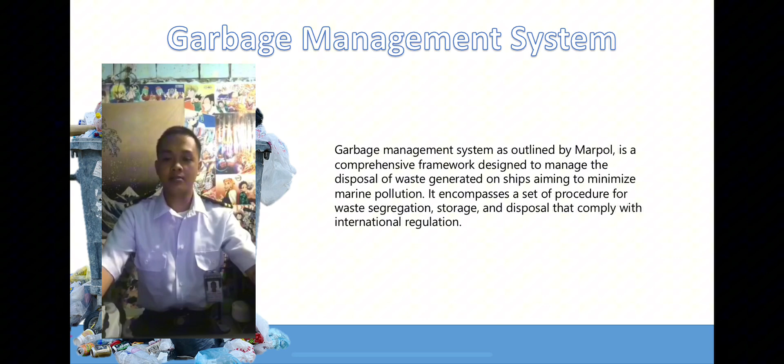The Garbage Management System, as outlined in Annex 5 of MARPOL, is a comprehensive framework designed to manage the disposal of waste generated on ships, aiming to minimize marine pollution. It encompasses a set of procedures for waste segregation, storage, and disposal that comply with international regulation.

The system includes clearly designated bins for different types of waste, such as plastic, food waste, and hazardous materials, ensuring proper handling and treatment. It mandates the maintenance of accurate records of waste management activities, including quantities and disposal methods, to promote accountability. Training and awareness programs for crew members are integral to the GMS, fostering a culture of environmental responsibility.

Additionally, the GMS incorporates monitoring and compliance mechanisms to regularly assess adherence to the plan and address any issues. By implementing a robust GMS, vessels not only comply with legal requirements but also contribute to the protection of marine ecosystems. The Garbage Management System (GMS) outlined in Annex 5 includes procedures and equipment for managing waste generated on board.

For example, garbage categories. Here are some examples of garbage categories. Food waste. Food waste includes leftover food scraps, vegetable peels.

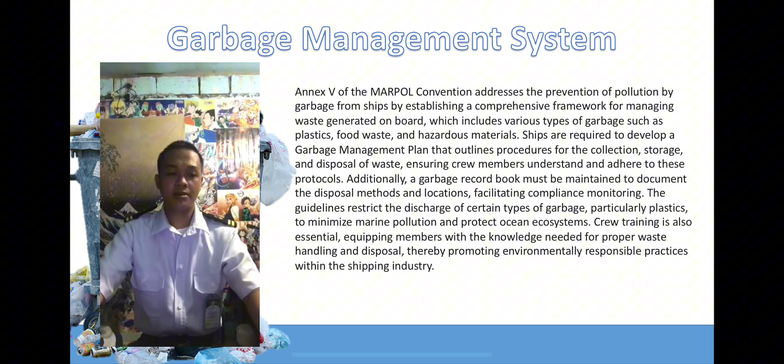It emphasizes garbage minimization, garbage collection, garbage storage, garbage processing, garbage disposal, equipment used on board for handling of garbage, and designation of the person in charge of implementing GMP. GMP stands for Garbage Management Plan.

Garbage Record Book. Entries in the Garbage Record Book. When garbage is discharged into the sea, it's necessary to record the date and time, position, categories, and amount of garbage thrown. When garbage is discharged to the reception facilities ashore, date and time, port, category, and amount need to be entered in the garbage record book.

When garbage is incinerated, it's necessary to record the date and time, position, and amount. For accidental or other exceptional discharge of garbage: date and time, position, category, amount, and reasons and remarks.

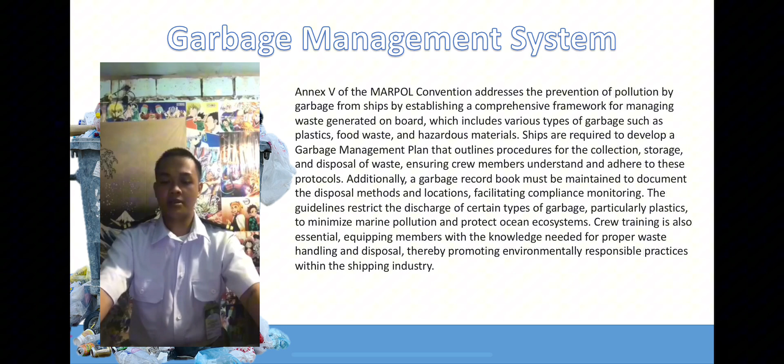Additionally, proper waste management ensures the safety and health of crew members by minimizing hazards associated with contamination and pests. It enhances the ship owners' commitment to sustainability, attracting clients and partners who prioritize responsible practices.

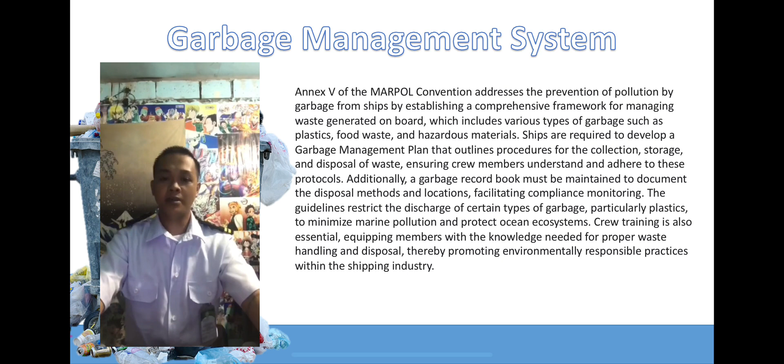Furthermore, a well-implemented GMS improves operational efficiency by streamlining waste handling and reducing disruptions, while also promoting recycling and resource conservation. Overall, adherence to the GMS is essential for legal compliance, environmental stewardship, safety, and operational effectiveness in the maritime industry. That is why it is important for us to understand the importance of the garbage management system under Annex 5 of MARPOL.

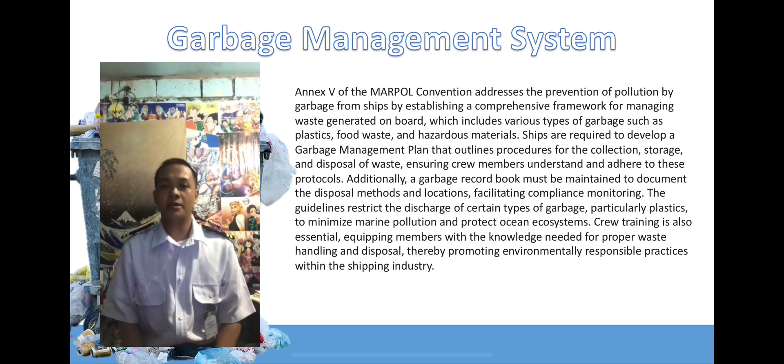Good morning, classmate. I will explain to you about the MARPOL Annex 5 reception facilities. MARPOL Annex 5 is especially designed to prevent pollution from garbage generated on ship. So the garbage or trash that we generate is covered by MARPOL Annex 5.

It establishes regulations that dictate how ships must manage their waste. This also covers how ships should manage their generated waste, including the requirement for adequate reception facilities at port to receive this waste. Wastewater, waste oil, and hazardous waste from ships are treated and processed in the port reception facilities.

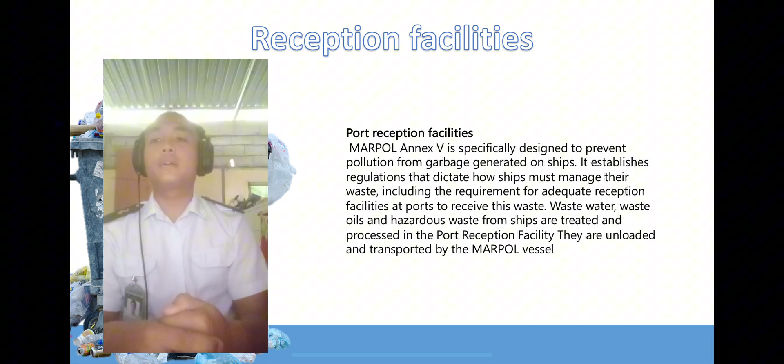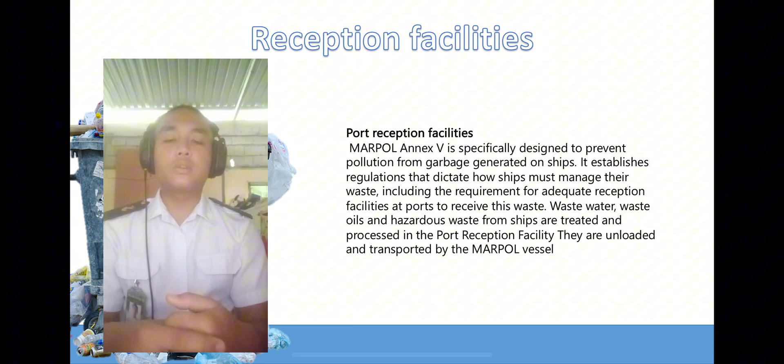Wastewater, waste oil, and hazardous waste from ships are treated and processed in the port reception facilities. They are unloaded and transported by MARPOL vessel. So the treated waste products from the ship are transported and unloaded by MARPOL vessel. Now, how reception facilities in MARPOL Annex 5 work.

When a vessel arrives at port, it must notify the port authority about its intention. This covers that before our ship arrives at the port, it should notify the authorities on land, especially if they will transfer waste products.

The port authority then coordinates with the designated reception facilities. This means our ship's authorities communicate with the reception facilities, which is the one who will manage, filter, and treat the waste materials from our ships.

Before transferring waste, vessels are required to segregate different types of garbage according to MARPOL guidelines. This segregation is crucial because it makes the process easier, and makes treatment and disposal of our waste easier. Common examples include food waste, plastics, paper and cardboard, glass, and hazardous materials.

For transfer operations, upon arrival at the reception facilities, our crew is required to wear PPE or personal protective equipment for their own safety, and in case an incident occurs.

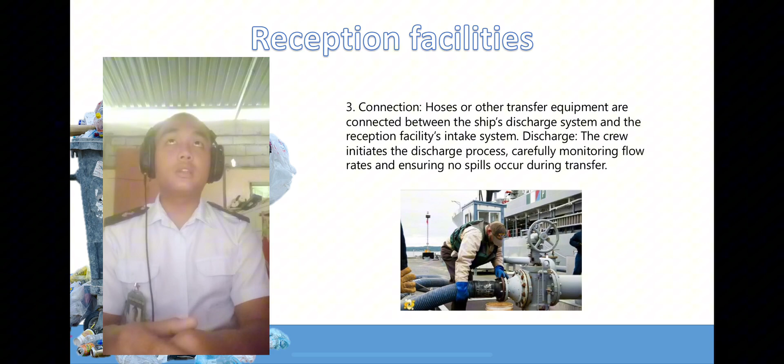Treatment and disposal at reception facilities. Once received, the facility processes the waste according to local regulation and best practices. There are three types: sorting, processing, and disposal. In sorting, further sorting may occur to separate recyclable materials from non-recyclable ones.

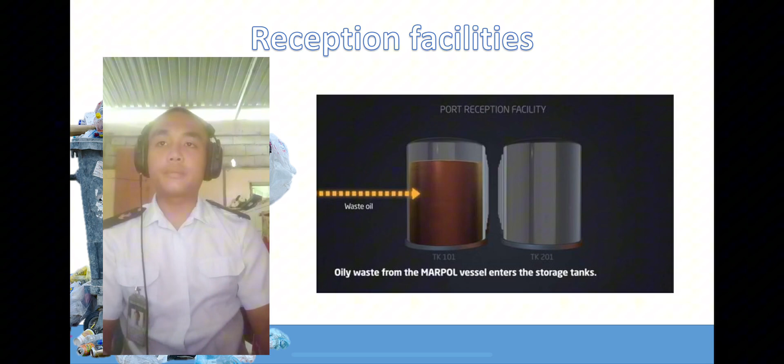The oil emulsion is transferred from a storage tank to a process tank. This is the waste that has been processed as I mentioned.

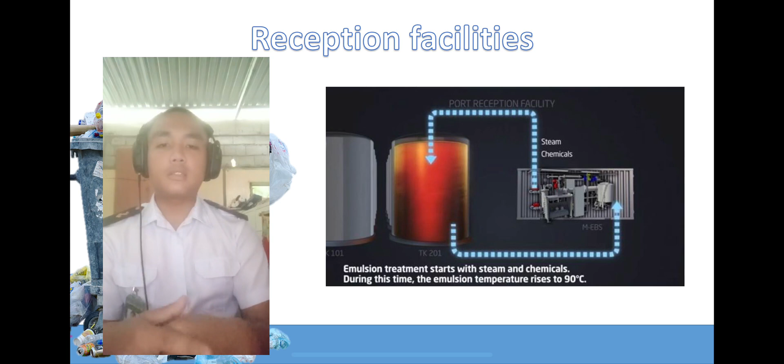Emulsion treatment starts with steam and chemicals. During this time, the emulsion temperature rises to 90°C. They use chemicals to treat the waste product, like oil and similar materials.

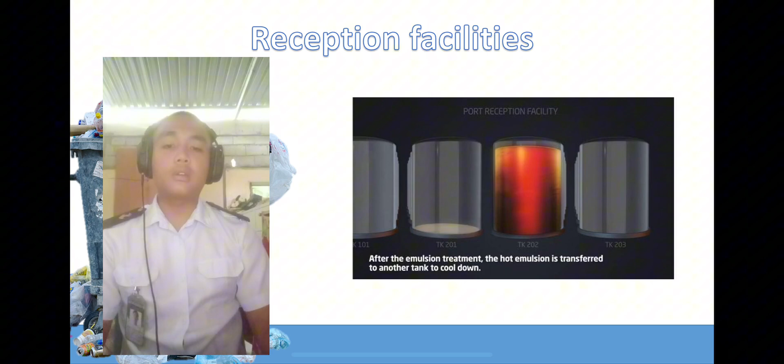After emulsion treatment, the hot emulsion is transferred to another tank to cool down. This is the processed and treated waste product from the vessel, transferred to another tank to cool down, removing the heat during the process.

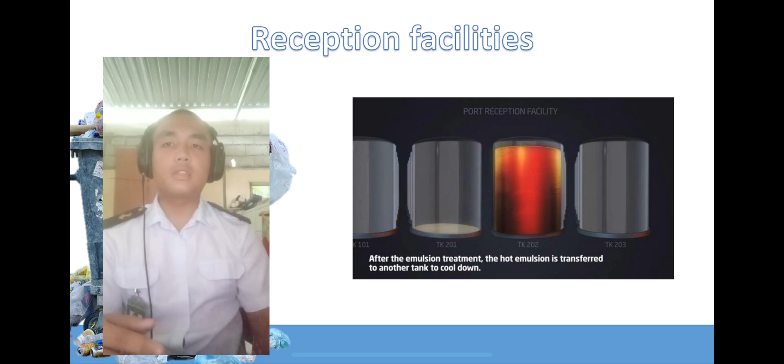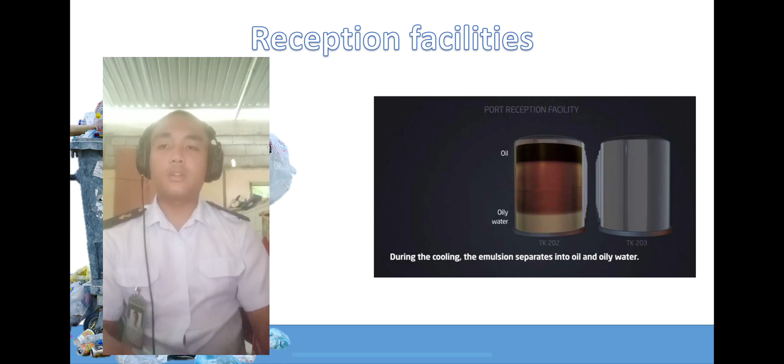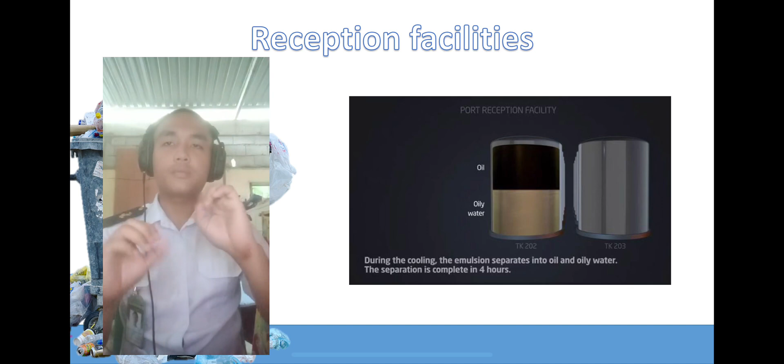Emulsion separates into oil and oily water during the cool down. The separation is completed in 4 hours. During this time, it compresses in the middle, with oil on top and oily water at the bottom.

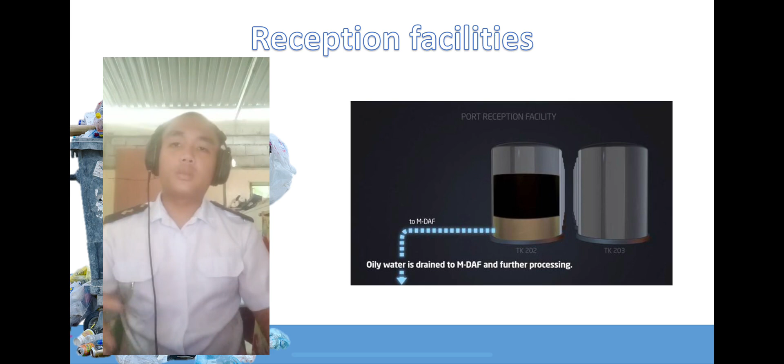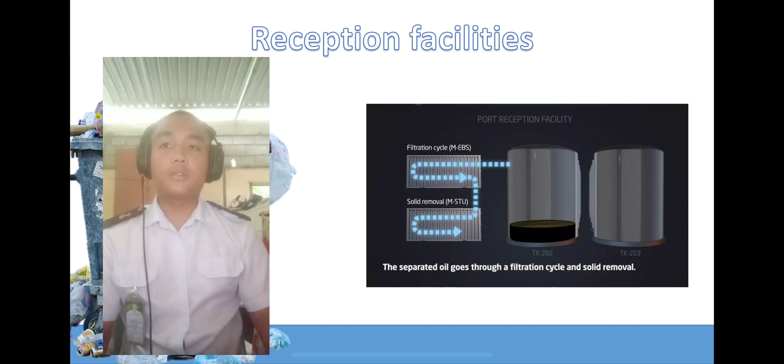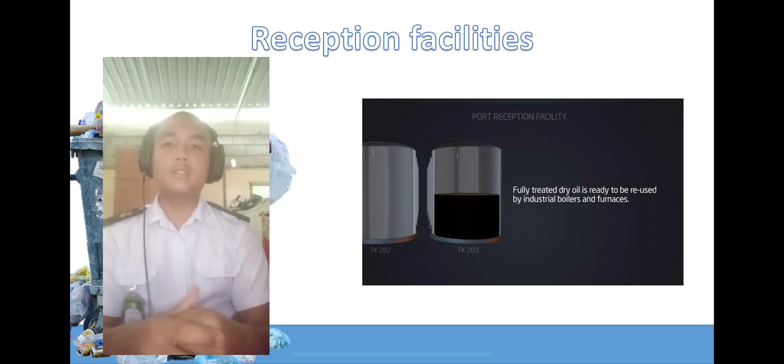The separated oil goes through a filtration cycle and solid removal. You can see this process in the picture, until it becomes fully treated dry oil. This fully treated dry oil is now ready to be reused by industrial boilers and furnaces.

So, exemptions. MARPOL Annex 5 generally prohibits the discharge of all garbage into the sea. As discussed in the general prohibition earlier, all kinds of waste are prohibited from being thrown into the sea under Annex 5.

But of course, there are exemptions. Food waste is exempted, provided there are certain specifications or requirements. Food waste can be disposed of if it is more than 12 nautical miles from the nearest land and has been comminuted or grounded.

Next is cargo residues. Cargo residues may be discharged under certain conditions, provided they comply with specified criteria, such as not being harmful to marine life.

The same goes for the following: cleaning agents and additives contained in cargo holds, deck, and external wash water. These garbages can be discharged into the sea as long as they meet the requirement of not being harmful to marine life.